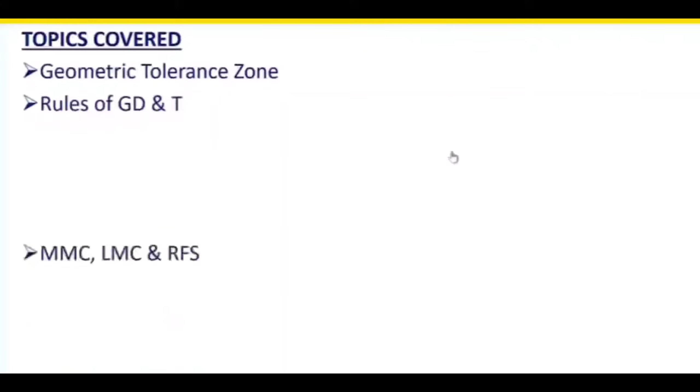Welcome to the session. The following topics will be covered in this session: geometric tolerance zone, rules of GD&T, MMC, LMC and RFS, datum reference, the do's and don'ts for proper display in drawings, and flatness.

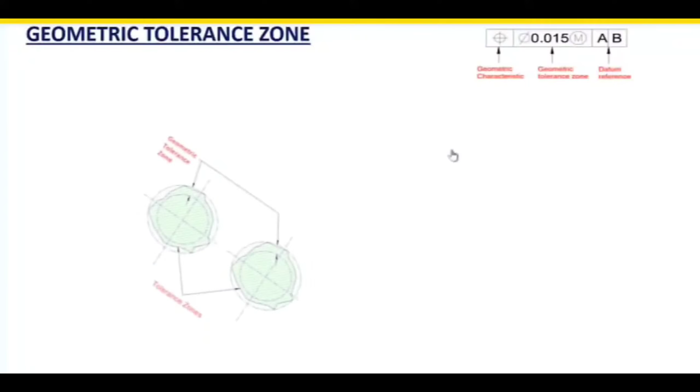So geometric tolerance zone. What is geometric tolerance zone? It is the second zone in the feature control frame. The first zone is for the geometric characteristic, which we have learned in the earlier session, the 14 geometric symbols, and the second one is the geometric tolerance zone. As you can see in the drawing below, it is the range, from the minimum to the maximum.

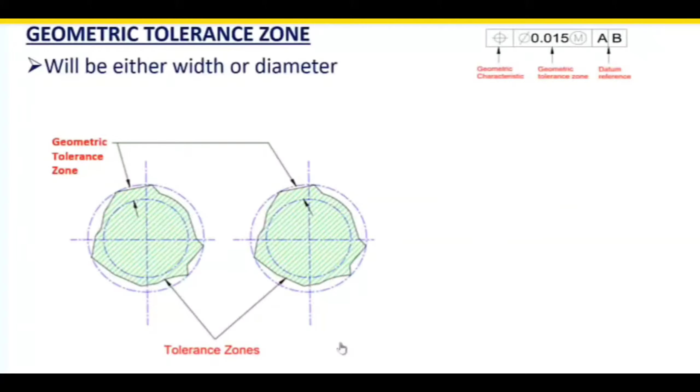It will be either a width or a diameter depending upon where it is being applied. A diameter symbol will precede the value if it is a cylindrical tolerance zone. For example, in this drawing, straightness should be within a cylindrical tolerance zone of 0.1. That is why a diameter symbol is given. If a diameter symbol is given, it means it is for a cylindrical tolerance zone.

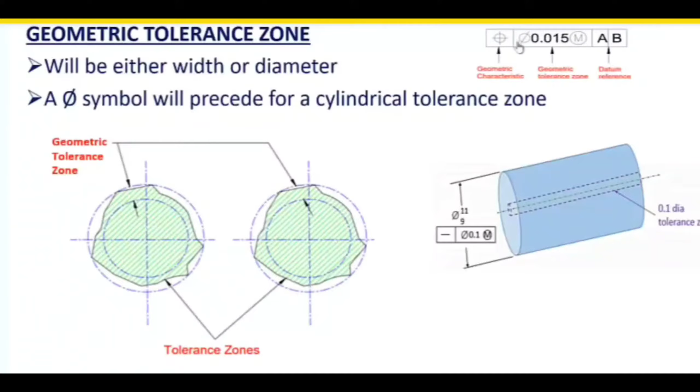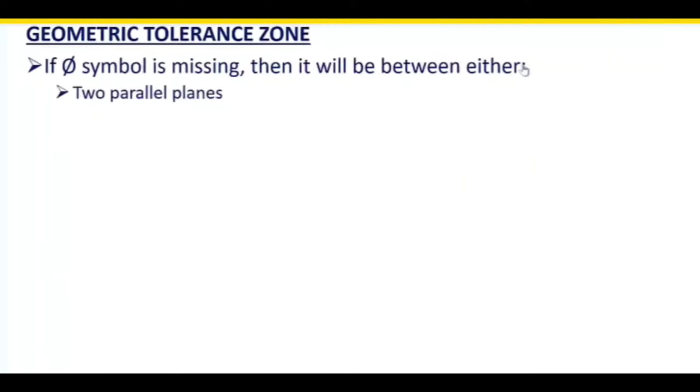In the geometric tolerance zone, the value will be the value within which your geometric characteristic should lie, and if it has a diameter symbol before the value, it's a cylindrical tolerance zone. If the diameter symbol is missing, then it can be between two parallel planes, two parallel straight lines, or two uniform boundaries as shown in this figure.

In this figure you can see there is no diameter symbol in front of the geometric tolerance zone's value. The symbol given in the geometric characteristic is for symmetry. So it is saying it should be symmetrical within a wide tolerance zone of 0.004 for this particular slot.

This slot is straight. So this slot can be within a wide tolerance zone of 0.004, symmetrical with reference to A. A is the component face, which they have made the datum. So when you have a dia symbol, it is for a cylindrical tolerance zone. When the dia symbol is missing, it is for a wide tolerance zone.

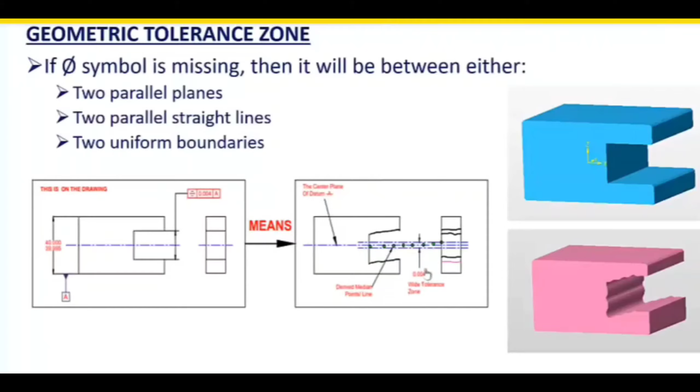Now we are coming to the rules of GD&T. There are three rules to be followed in GD&T. These three rules are common for all industries like aviation, heavy equipment, and automobile. Wherever you go, these three rules are common, as GD&T is applied throughout any industry. Aerospace also follows the same GD&T.

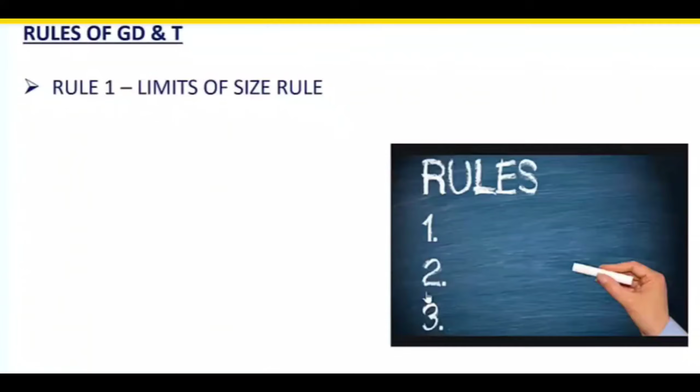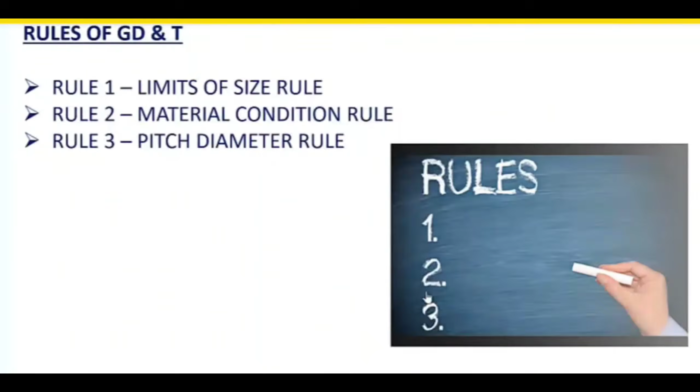The first rule is the limits of size rule. The second rule is called the material condition rule, and the third rule is called the pitch diameter rule. We will see these three rules in detail. So first rule, limits of size rule.

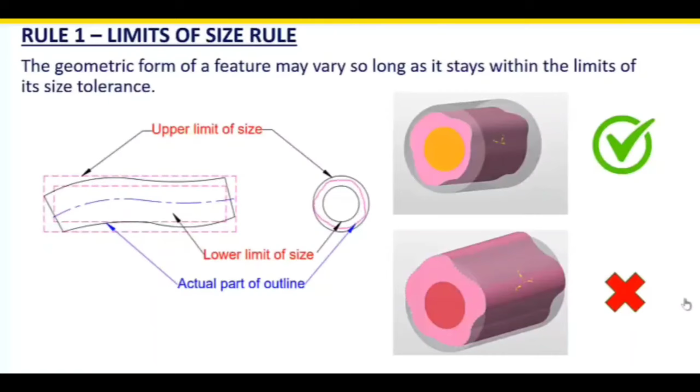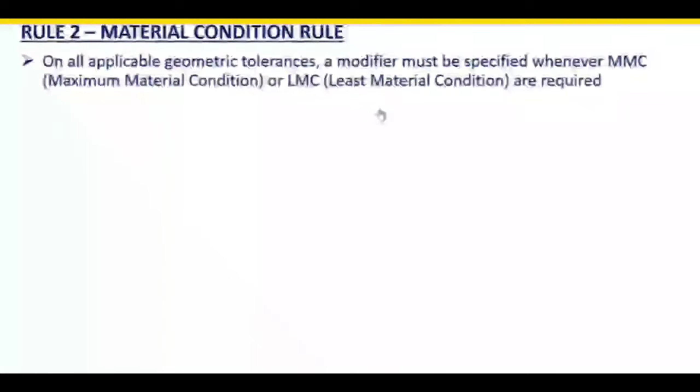So rule number 2, a very important rule, the material condition rule. What it says is, on all applicable geometrical tolerances, a modifier must be specified whenever MMC or LMC are required. MMC means maximum material condition and LMC means least material condition. That is the correct terminology. RFS means regardless of feature size. It will be applied when no modifier is present.

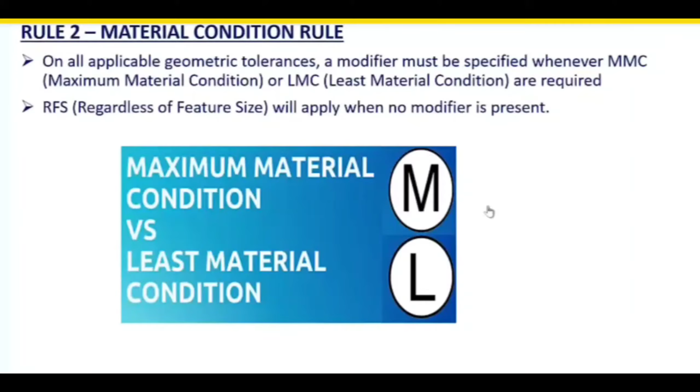So how we represent it in the drawing is, for maximum material condition we use the letter M enclosed inside a circle, and for least material condition the letter L enclosed within a circle. So if you find symbols like this, L means least material condition, and when you see a letter M within the circle, it means maximum material condition. So we will see what maximum and least material condition are and how they impact. So MMC and LMC.

First of all, what is MMC and what is LMC? As the name implies, maximum material condition means the feature is produced at the maximum material condition, meaning it can be reworked and you can remove further material and make sure that the component still lies in the tolerance zone. Least material condition is the worst case. After this you can't do any rework or remove any material, and if you remove any material, this component will be rejected. So MMC means maximum material is there and it is within your tolerance limit, so you can do rework and still bring it within the tolerance, and your component will be accepted. That is what MMC and LMC say.

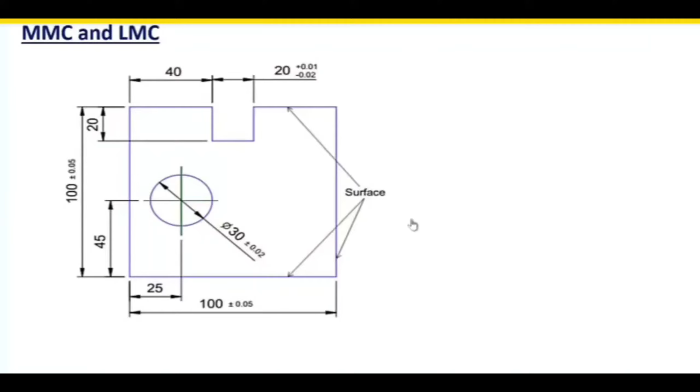For hole features it will be slightly different, and for a shaft, bar or pin it will be slightly different. So now we will find the MMC and LMC for each feature. First we are going to find it for the slot. What is going to be the MMC and LMC for the slot? The slot is like a hole feature. The easy method is to find the size of the slot. As per the given drawing, the size of the slot can be between 19.98 and 20.01. We need to write that down.

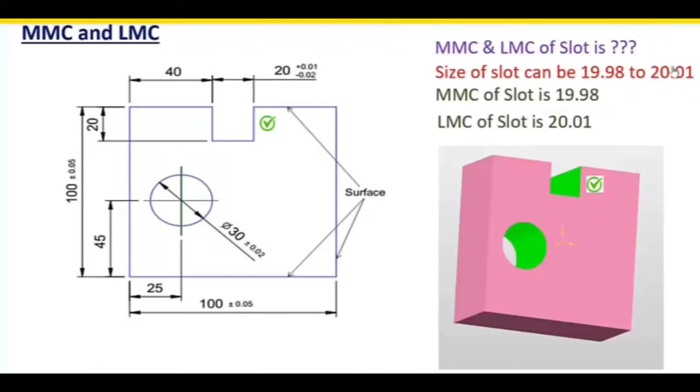From this, you can say what will be the bigger size and the smaller size. The bigger size is 20.01 and the smaller size is 19.98. Since it is a hole feature, maximum material condition will be the smaller size and least material condition will be the bigger size. This is the easy way to detect the MMC and LMC values. Find the size of your slot or hole feature as per the given drawing, and write it down from the lower to the maximum. The lower size will be the MMC and the bigger size will be the LMC, meaning MMC is 19.98.

For example, in this component, after 19.98, if I am doing some rework on the slot, I am going to remove some material.

When I remove the material, your slot width will be increasing. When you remove some more material, instead of 19.98, it may become 19.99 or 20 or 20.01, but it can't go below 19.98. So when you are reworking, it can go up to 20.01. So that is what we say, it is maximum material. So 19.98, it is accepted.

19.98 is also accepted since it is lying within the tolerance, but if for some reason your flatness or straightness is going to miss and you are going to do some rework, then also you can do it if your component is at maximum material condition, and then you can make this piece accepted.

Whereas in the least material condition, it is already with the minimum material, already it's 20.01, the bigger size. If I try to remove any material to make any of your geometric characteristics come within the tolerance, then this size will increase to 20.02 or 20.03, and this component will be rejected.

So MMC is like a best condition, you can say, meaning that there is more material and there is room for rework, and if you want to play with anything, you can do it with the MMC. So for hole features, MMC will be the smaller size and LMC will be the bigger size of the feature as per the given tolerance.

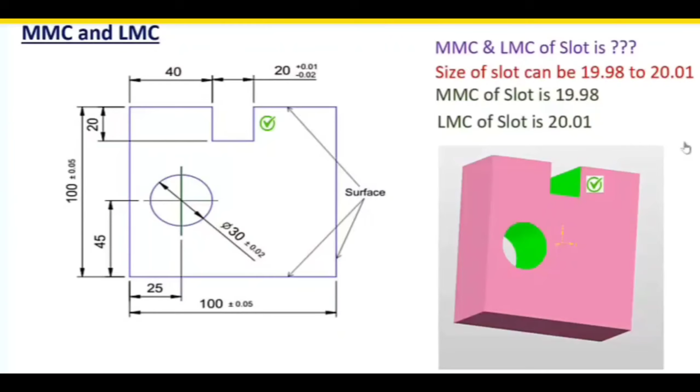Now we will find the LMC and MMC for a hole. In this case, the hole diameter is 30 plus or minus 0.02. Same principle we are going to apply now. So what size can your hole feature vary? It can vary from 29.98 to 30.02 as per the dimension given in the drawing.

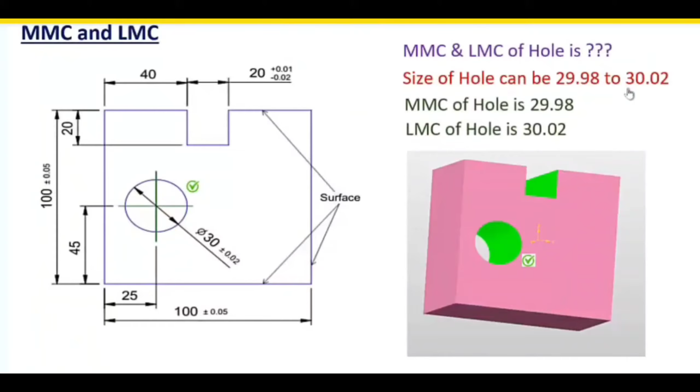So from this we can derive what will be the MMC. MMC, as I mentioned earlier, is the smaller size, so it's going to be 29.98, and LMC will be the bigger size, 30.02. Same concept as we explained for the slot, we can do it for the hole also. This is for hole features.

Now we will find the LMC and MMC for the opposite side, not a hole, but a block, or pin, or a cylinder or shaft, something like that. So it will be the opposite case. For example, what is the MMC and LMC for a block? The block size is 100 millimeters, as per the drawing, 100 plus or minus 0.05.

So you need to write down the minimum and maximum size between which this component can vary. The block thickness or block height can vary between 99.95 millimeters and 100.05. Which means that if your component width is anywhere from 99.95 to 100.05, this component can be accepted.

So in this case, it is maximum material condition if it is bigger, meaning that I can remove material. The slot was a female feature, a hole feature, and this one is like a male feature. For these kinds of features, when you remove the material, the size will be reducing. So when it is reducing also, the component needs to be accepted.

So in that scenario, 100.05 will become the maximum material condition of the block, meaning that when you have produced a component at 100.05 block width, you can rework it, you can grind it, or do some other operation, and if you reduce it, the size will come less than 100.05, but above 99.95. If it is between this range, it is going to be accepted. So that is what MMC means, maximum material condition.

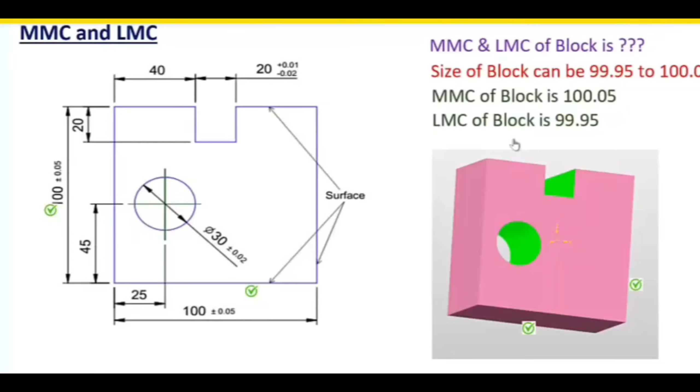So these things will be applied as per the designer's view, how he is going to use it for the assembly. Accordingly, he can apply them. When we need to specify anything in the drawing, you can use, as I mentioned earlier, the letter M within the circle for MMC and letter L for LMC. We will look into one more figure for identifying LMC and MMC quickly, just a snapshot.

So now I'm going to find the MMC and LMC for the center hole. The hole diameter is 8 plus or minus 0.002. So the size of the hole can vary between 7.998 to 8.002 as per the drawing. So as we discussed earlier, MMC for a hole feature will be the minimum size. So it is 7.998, and LMC for the hole feature will be the maximum size. It is 8.002.

Similarly, we are going to find for the next feature, slot. So slot, again, it is a female feature, similar to a hole feature. So the size can vary between 6 to 6.001 as per the drawing, and MMC for the slot will be the minimum size, that is 6, and LMC for the slot will be maximum, that is 6.001.

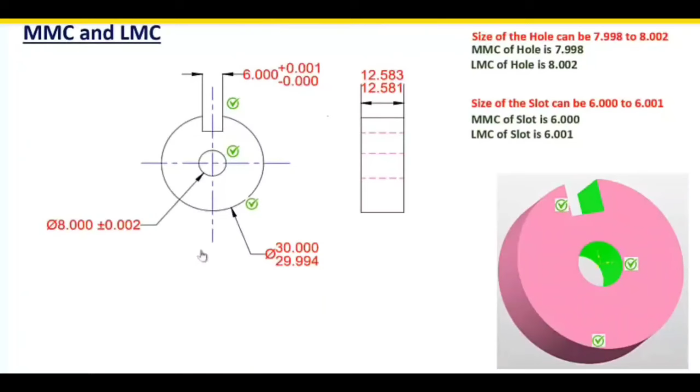Now we will find for the OD, that is the block. The block is going to be the opposite feature of the hole. So we need to find carefully. So the size of the block can vary between 29.994 to 30.000. So in this case, the maximum material condition will be the maximum value of your block, and least material condition will be the minimum value of your block, that is 29.994.

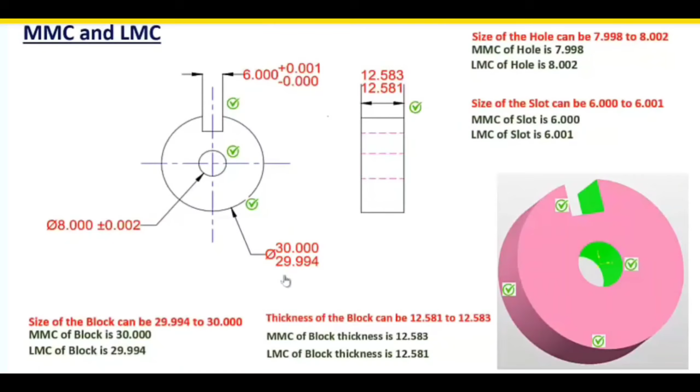And when you consider the thickness, again thickness is like your block only, not like the hole feature. It can vary as per the drawing, 12.581 to 12.583. Since it is like a male feature, the maximum material condition will be the bigger value, that is 12.583, and least material condition will be the least value, that is 12.581. So this is the easiest method to find the LMC and MMC of a feature as per the tolerance that is given in the drawing.

And the third rule is pitch diameter rule. We use this one for the threads. If you are mentioning anything for the threads in the drawing, if it is given like this, just a feature control frame alone, which is having the geometric characteristic, your geometric tolerance zone and datum references, and if you don't write anything, then it applies for the pitch diameter. If you are giving the maximum material condition here, then it applies for the pitch diameter.

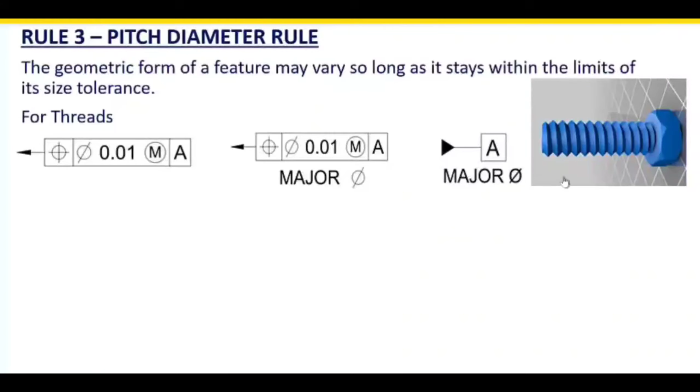If you want to mention anything for the major diameter or the minor diameter of the thread, it needs to be written like this, major diameter or minor diameter. Like that, whatever you want, you can write it here. This is for threads. If we are applying for gears or splines or those kind of features, then we need to write even for the pitch diameter also. So if you want to mention anything, you need to mention.

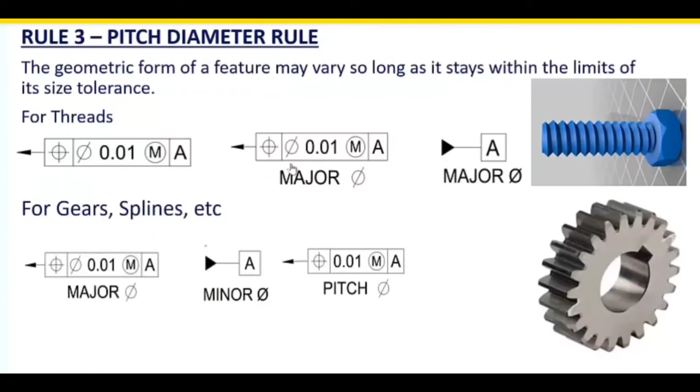So whenever we are representing gears or splines in the drawing with a feature control frame, you need to mention whether it is for the pitch diameter or for the minor diameter or for the major diameter. Those values need to be written in the drawing. Whereas for normal threads like ISO threads or UN threads, you need not mention it if you are representing it for the pitch diameter. You need to write only if you are mentioning for the major or for the minor diameter. So this is about the pitch diameter rule.

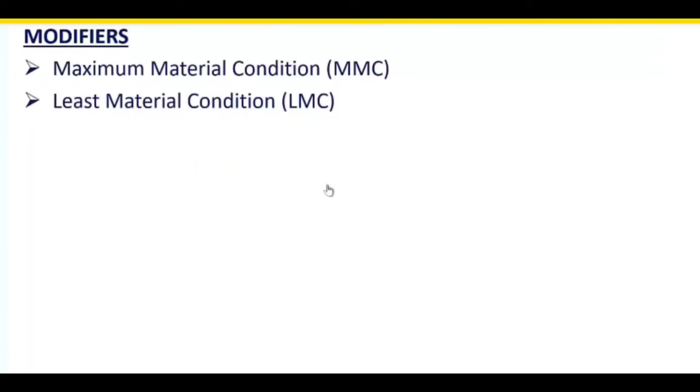Now modifiers. So again, we discussed earlier, that is rule number 2. Maximum material condition and least material condition. These are called the modifiers. These modifiers can be applied to the geometric characteristics. What are the geometric characteristics? Straightness, parallelism, squareness, angularity, position, concentricity and symmetry. So these 7 geometric characteristics can have the maximum material condition or least material condition modifiers whenever they are used in the drawing.

For other geometric features, it is not at all applied. It can only refer to a feature of size. That is the reason we are applying it for straightness, parallelism, squareness, angularity, position, concentricity and symmetry. So only these features can have the modifiers. Modifiers are nothing but the maximum material condition and least material condition. When there is no maximum material condition symbol or least material condition symbol, it is called regardless of feature size.

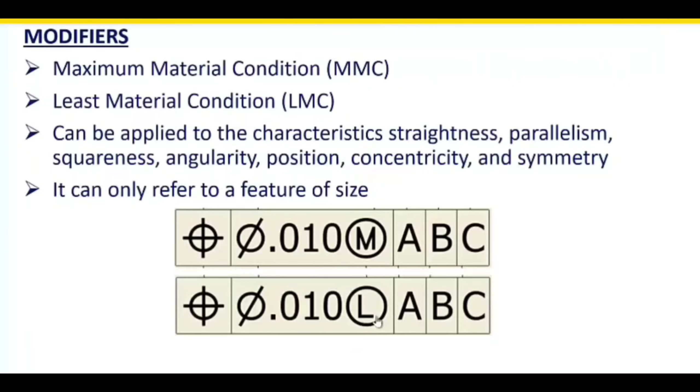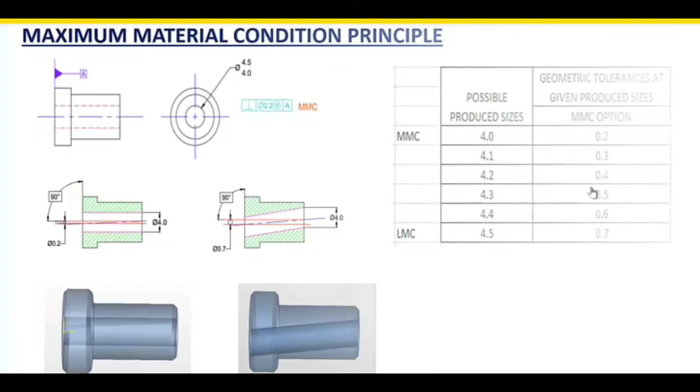So the opposite condition, least material condition, how is it going to play? Same, it will be in the opposite direction. For example, as per this feature control frame, the 4.5 to 4 mm hole's perpendicularity should be within a 0.2 cylindrical tolerance zone when the hole is at LMC, that is least material condition. Here 4.5 will be the least material condition. When it is at least material condition of 4.5, the perpendicularity tolerance should be 0.2. When it moves towards the MMC, the perpendicularity can also increase.

So these are all given by the design engineer in the drawing. As per the drawing, the quality checker can check it and take a decision whether this component can be rejected or accepted, even though the perpendicularity tolerance is not within 0.2. The reason is we have applied a modifier, that is L or M, present in this geometric tolerance zone.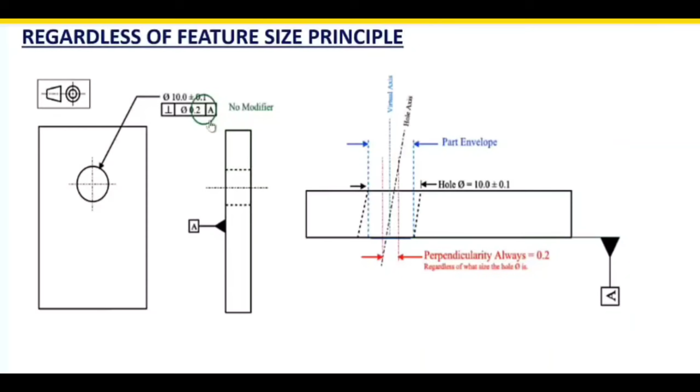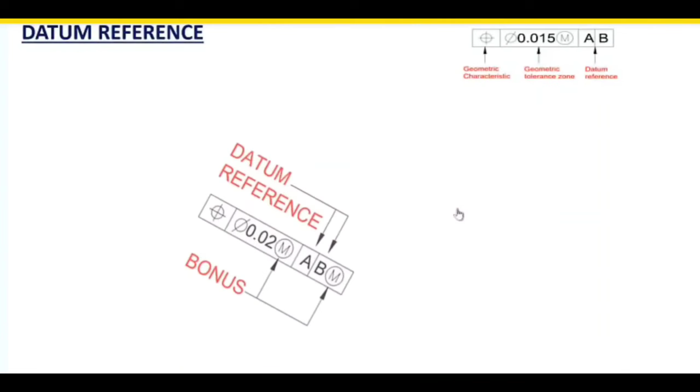Now we'll see the datum reference. In the feature control frame, we have three zones: the geometric characteristic zone, the geometric tolerance zone, and the datum reference zone. The geometric characteristic zone is nothing but the geometric symbols which we discussed in the last session, and the geometric tolerance zone we have just discussed. Datum reference is nothing but with reference to what datum you are specifying your geometric characteristic.

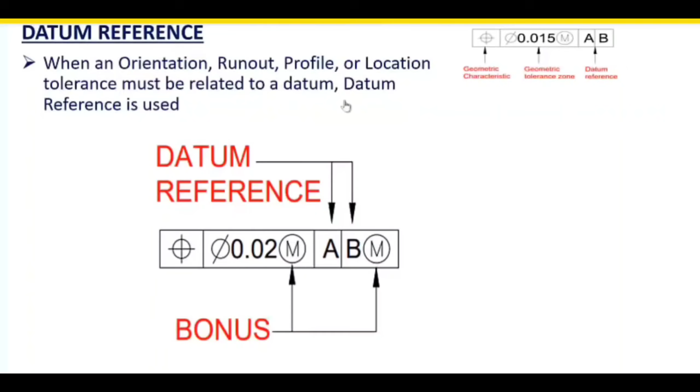The datum reference can be used along with the orientation, runout, profile or location tolerance in FORPL, except F, which is for form. So except for the form tolerance, this datum reference can be used for the other four categories. Orientation, runout, profile or location tolerance must be related to a datum, so a datum reference is used whenever you need these tolerances.

The conditions or principles for datum references: there can be a maximum of 3 datums and they are listed in the order of importance. For example, in this drawing, as per the feature control frame, A, B, C is given. It can be B, A, C also. If it is A, B, C, then the first one is the primary, the second one is the secondary, and the third one is the tertiary. If it is B, A, C, then B becomes the primary and A becomes the secondary datum.

So this is as per your drawing. However you have created the datums in the drawing, accordingly you can keep them here. There is no need that it should always be A, B, C in alphabetical order. It can be changed as per our drawing design where we have selected the datums. But the first one will be the primary datum, the second the secondary, and the third the tertiary. And it is not compulsory to have all 3 datums. There can be only 1 or 2 datums, or you can have 3.

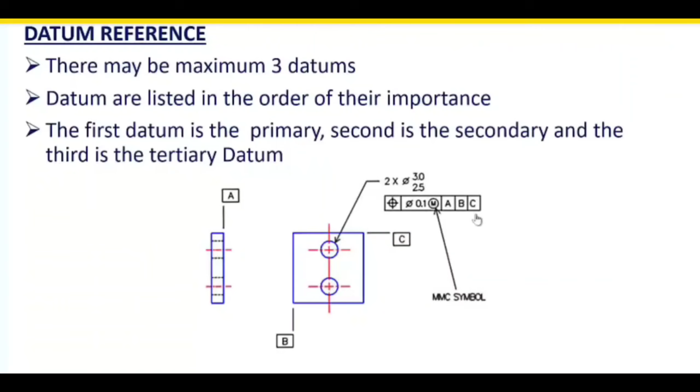So the do's and don'ts for proper display. This is a snapshot of all the geometric tolerances, which we'll see in detail in further sessions. It will give you some idea of how feature control frames need to be properly represented in the drawing, so that the reader will not get confused and interpretation will be much easier. Under form tolerance we have flatness, straightness, circularity and cylindricity. The common element for all these 4 is that there is no datum reference, as we discussed in the previous slide.

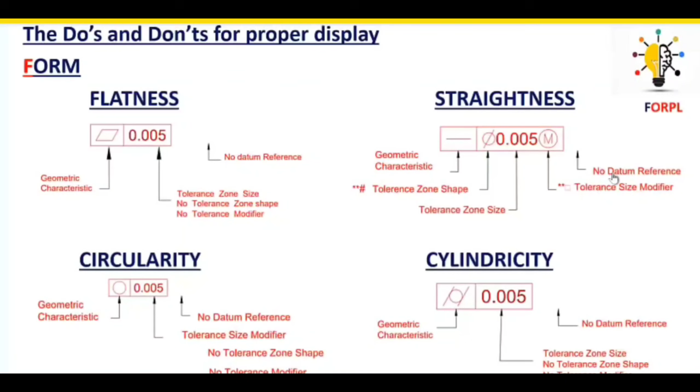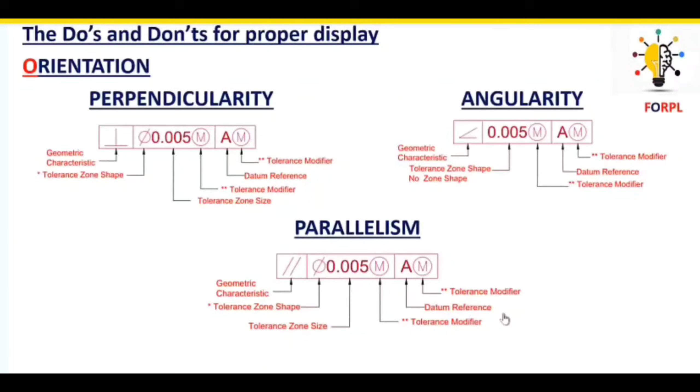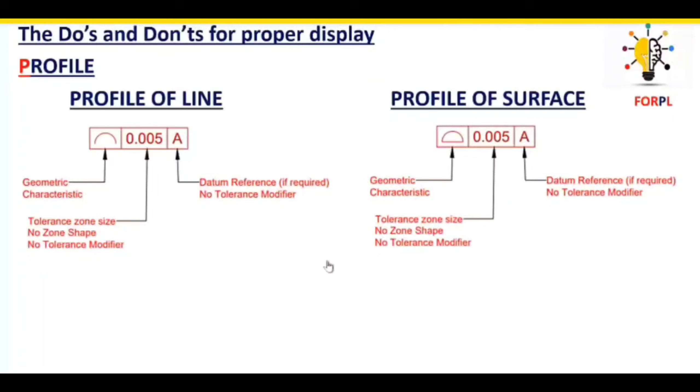This is for the orientation tolerance, where datum references are mentioned in all 3: perpendicularity, angularity and parallelism. Next is runout tolerance; total runout and circular runout can also have a datum reference. Profile of a line and profile of a surface can both have a datum reference if required. And for location tolerance, same thing: position, concentricity and symmetry all have a datum reference.